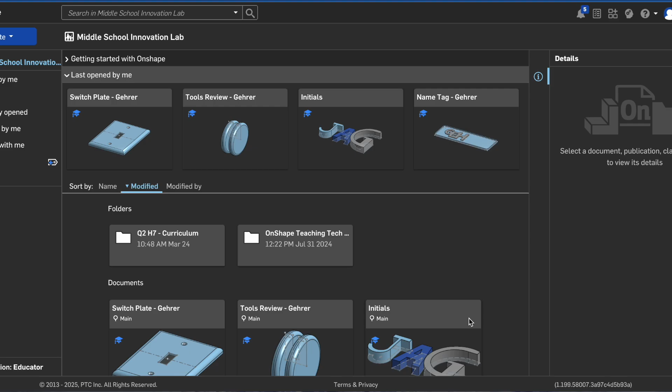So for this lesson, you're going to be making your own custom dice.

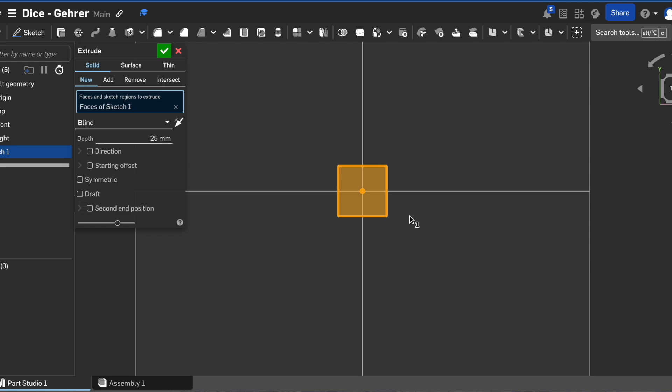Alright, so we're going to start with a sketch on the top plane, as we always do. We're going to start with a rectangle, and we're going to make this a standard size dice, which is going to be 16 millimeters by 16 millimeters. We're going to extrude that, so Shift E, and extrude it to 16 millimeters.

So we now have a cube. Now on dice, we're actually going to fillet the edge. If I click on the faces, it will go ahead and do all of the sides. So now I have these rounded edges everywhere.

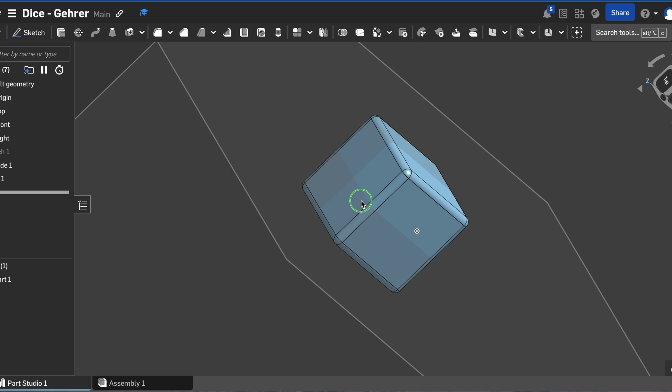Okay, so now I need to put a sketch on the face. So that's a new sketch, and click on that face. I'm going to hit N. Let's start with the easy one. Let's go with a circle, and let's go 3 millimeter. You can adjust as needed when you start to do the other sides here.

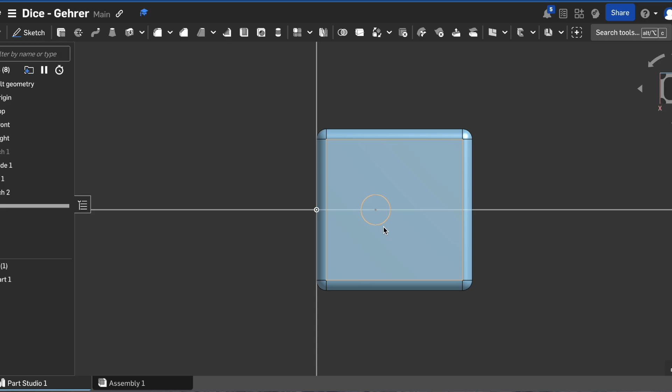So now we need to open up that sketch again. Now we need to dimension this. So what I'm going to do is create a line, and that is going to be a construction line. So I hit L and then I hit Q. It gives you a construction line.

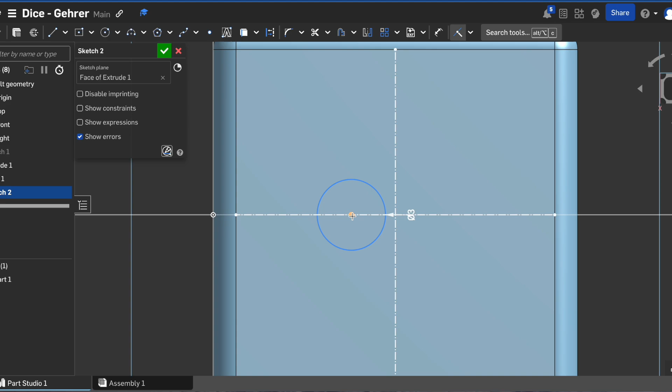If I hover up here to the top, you'll notice I get that orange square in the center, so that's going to give me my center line that direction. I can hit escape, do the same thing, L and Q, center line here to here. And now that I have a center point, I can hit the I key, and select the center point of the circle and the center point here. And now I know that that is completely aligned. On the other sides, you might have to do some math to make sure you get these aligned where you want them.

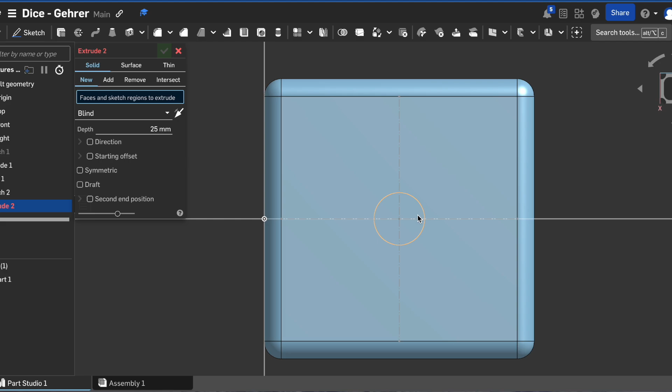Alright, so once I have my sketch, I'm going to hit extrude. I'm going to click this, and remove it - part 1 is my merge scope. Now I don't want this to go all the way through, obviously, we're going to go in 1 millimeter. Yeah, let's go 1.2 because that will give me, based on our 3D printing layers, that will be correct.

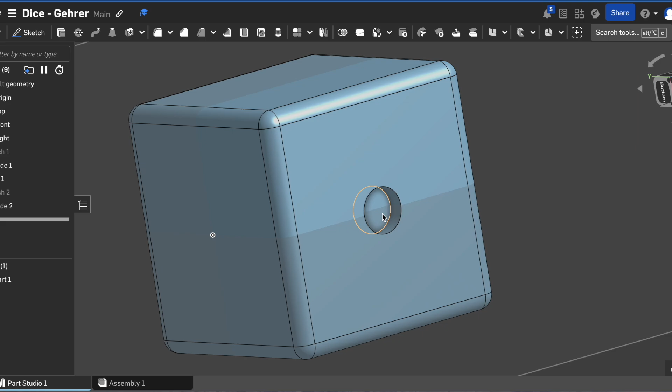So we'll do that. And then I don't really love how that looks. I'm going to go ahead and put a little fillet on that edge. No, that is not it. I'm going to put a little chamfer on the inside. No, I think it's a fillet, but down here. That is too big.

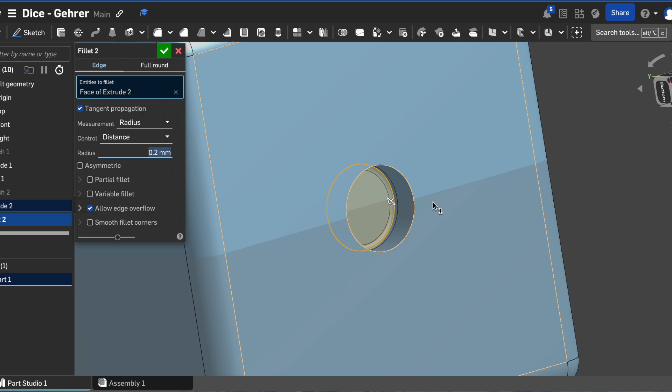So maybe that's all it was, I just wanted a smaller fillet. I think I just like the inside one, so I'm going to get rid of that outside edge there. Actually, you know what I think it is? I think it's too deep. Let's go half of that. Let's go 0.6. There we go. That's better.

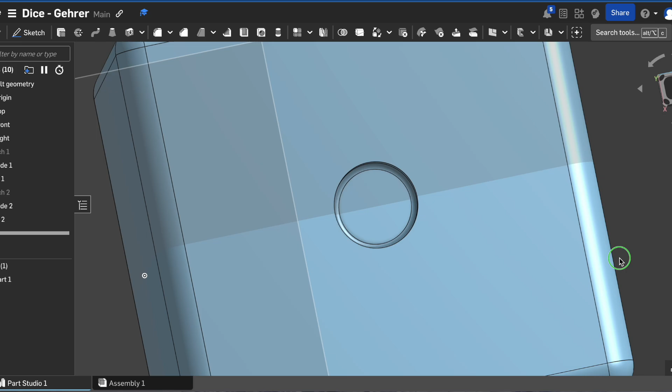So now what you're going to do from here is you're going to complete the dice. Now, you do not have to add that fillet, you can chamfer. Again, it's going to be a custom dice here.

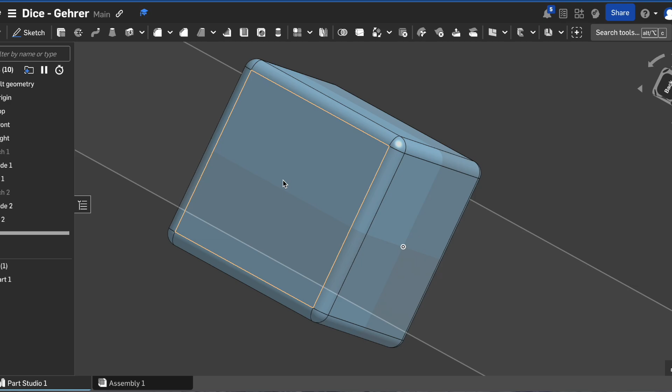On a standard dice, the opposite sides add up to 7. So if I have 1 here, that means this side of the dice over here would be 6. And then if I had 2 up here, I'd have to go to the opposite side, 5. So that would be a standard dice. So you're going to go ahead and complete this, and we will get these printed.